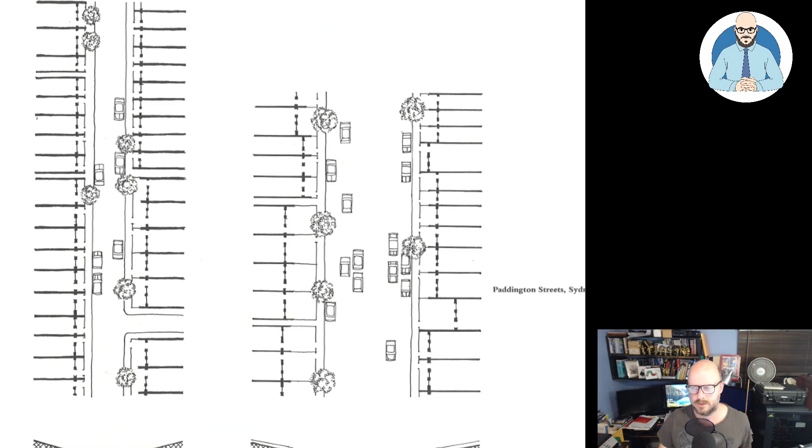So let's have a look. We'll go back in time and we'll look first at Great Streets. I'll hold it up again - here it is. Don't buy the hardcover on Amazon, it's like $400, get the paperback. It's a fantastic book if you're studying architecture.

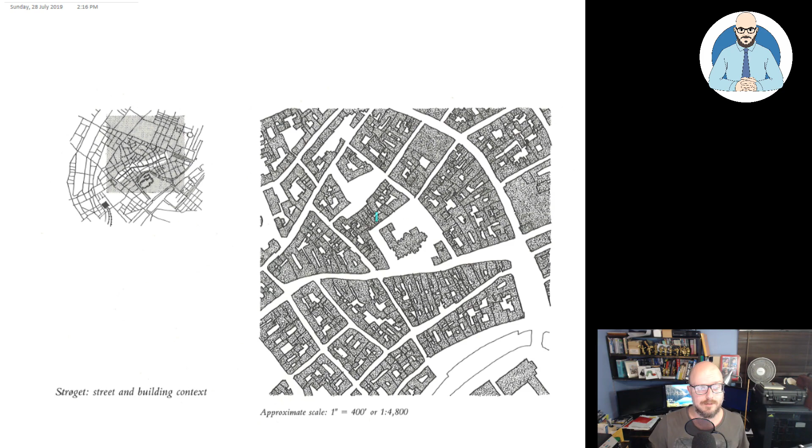So here we have an example, and this is from Italy. Oh, actually, I didn't want to look at that one first, we'll just skip down here. Sorry, we'll look at Pompeii first. Pompeii in Italy, we all know of the ancient Italian city that was preserved.

So this scale here, that's 1 mile across. So every one of these figureground diagrams we're looking at are about a mile across, which is 1.6 kilometers. And the arrow is pointing up - that's the north point. So every map, every plan should be drawn so that north is up the page.

Should. And you can see here we've got a variety of different streets. You've got larger streets and smaller streets, and it is generally in a grid pattern. There are a few dead ends at certain points, but that could have more to do with where it was, maybe on the coastline, or what is built around. But the idea of this diagram is just to give us a really simple and easy to understand representation of the street layouts here. So you can see here is a main street, I would assume, going all the way down, a large one. It's breaking off, you've got other ones approaching it.

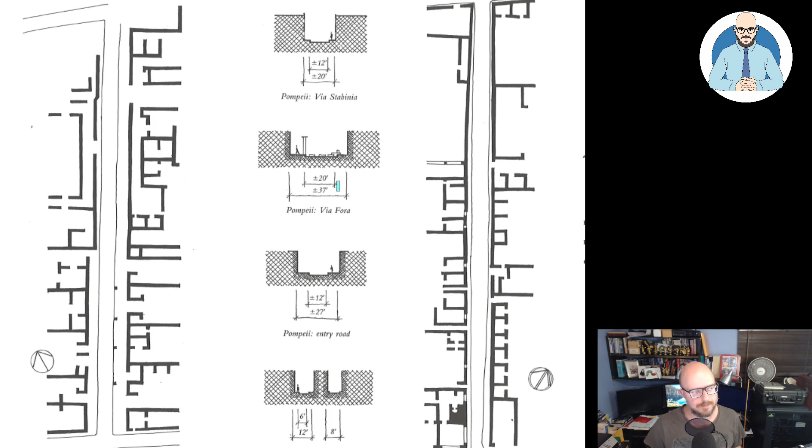So we'll have a look now at this - it's a plan view of a typical street. Okay, and this was on the left. We've got Herculaneum, we've got Pompeii on the right, and there's different sections through the street to get an understanding of it. So the Pompeii streets, Herculaneum streets, Ostia Antica - oh, you got to love my attempts at Latin. In the field, and I'm reading here from their book about ancient streets.

In the field, a sense of scale of these streets is difficult without buildings. At Herculaneum, where buildings remain, the scale is a pleasant one for a pedestrian. No sense of crowding despite small dimensions. This might have been different if there were many people on them. Nonetheless, the term human scale is appropriate. Walkways, as opposed to cartways, take a large proportion of any of these streets.

And you can see here, you've got up the center at a lower point. You can see in the diagram, you've got the pedestrian person there, scale, and slightly lower is the cartway. Here on these streets as well.

Streets are regular in layout, so they're easy to navigate and find your way around, not like the dead-end cul-de-sacs we have in all of our suburbia. The basic physical elements of contemporary streets are all there. Commercial uses, such as corner eating places, existed on these streets.

And also, I think Sargon of Akkad has a good video about the naughty words - that's it, brothel graffiti. And that was quite interesting to hear.

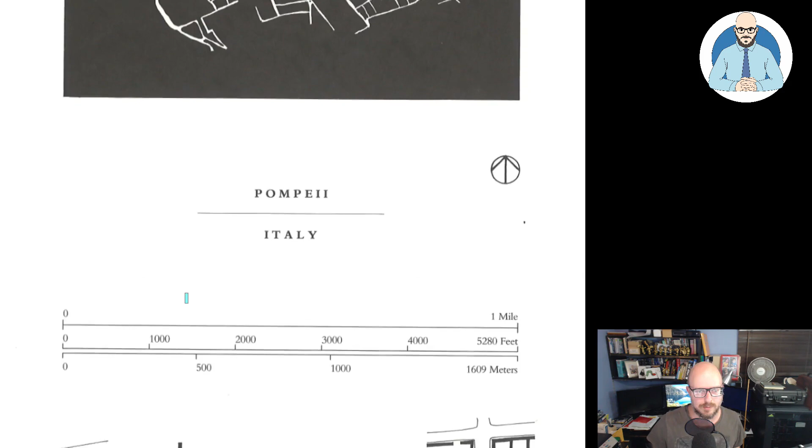And you can just see the scale here. This is a section through the street. And this is important to analyze how - the size of it, the height of the buildings, the scale of it, how high a person, how it feels to you psychologically as you're walking and using the streets, just the widths. And this is an important way to analyze it. So you go from this scale here where you look at the entire street to the sections here.

And then we'll move - oh, I've got Berlin there. We'll look at Berlin. So this is from the historic center in 1986. You can see here you've got the portion of Berlin, and then we've got some of the U-Bahn going across, or the S-Bahn. U-Bahn's above, S-Bahn's below, isn't it? I hope, I should know. I haven't been to Berlin in a while. And forgive the yellow on this image, it's the way I photographed it.

And we can see here, once again, this is a commercial street, so it's slightly different to the one we were looking at before, even though that had commercial aspects to it. So this is in the Kurfürstendamm in Berlin - oh, my German is rusty, my reading in German is probably as good as my reading in English.

So a central significant street with a long history, dating as a boulevard from around the late 1800s, continually changes and evolves. I'm reading from this Great Streets book: a finer street in '91 than in '73, when there were no trees in the central planting strip. So in '73 there were no trees, and they've added them here.

We can see in the section an understanding of the scale. We've got the people here, a building here, another one there, and a nice green tree space. The scale of the trees is important too, because we're going to look at some examples where the scales in our projects, or the examples we're looking at, will change over time, you'd hope.

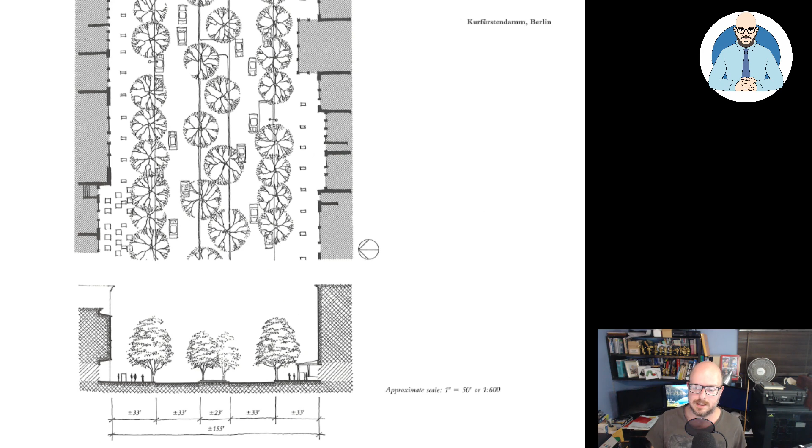Generally in summer, the view is kept low of branches, leaves, storefronts, not of buildings. So there you are - in winter it'd be a different thing. You can also see here where you've got the columns, so you've got a protected space running along here. Same thing here with the building, a protected space with the building coming over.

So you've got two options: you can walk under the trees, or you can walk under the protected space from the elements, which is an issue walking around the streets of Brisbane, I can tell you, particularly when it rains.

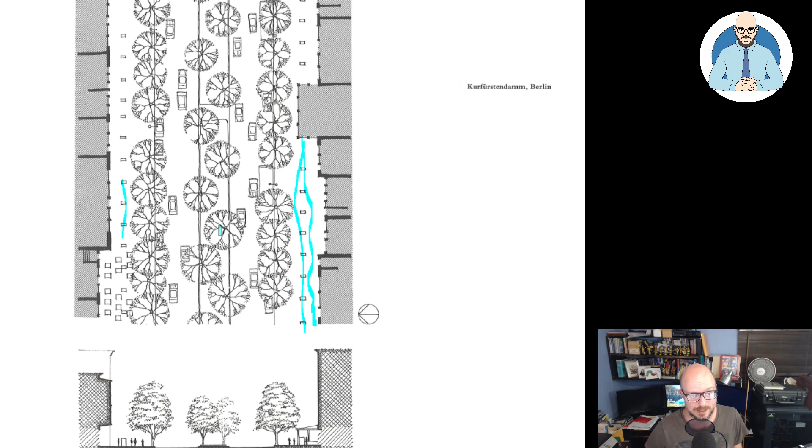And now let's have a look at Paddington in Sydney that was mentioned here. We can just see the figure ground diagram. This is a slightly different scale to the other ones, but it can give you an idea of the building density, built form, and the clear space around it.

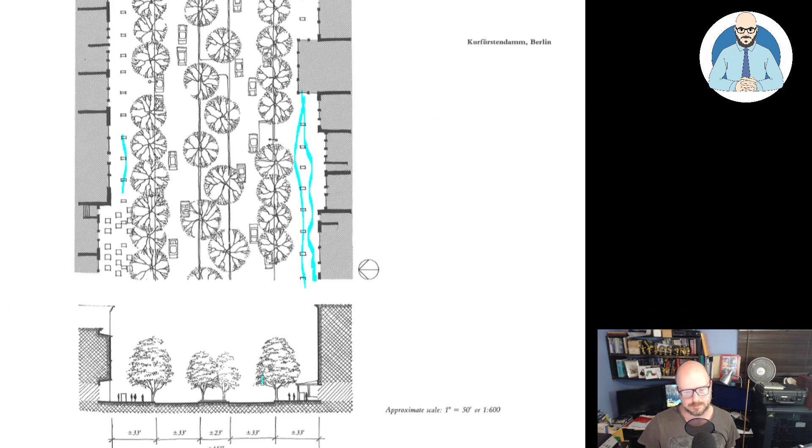This is kind of like a Nolli map in some ways, because it shows where you could publicly access, as opposed to the other ones which were a figure ground diagram just giving an idea of the blocks in the streets. But you can still get an appreciation of the block sizes and where the streets would be cutting through. These here are obviously the backs, at the back of the block, and the front here, I'd hope.

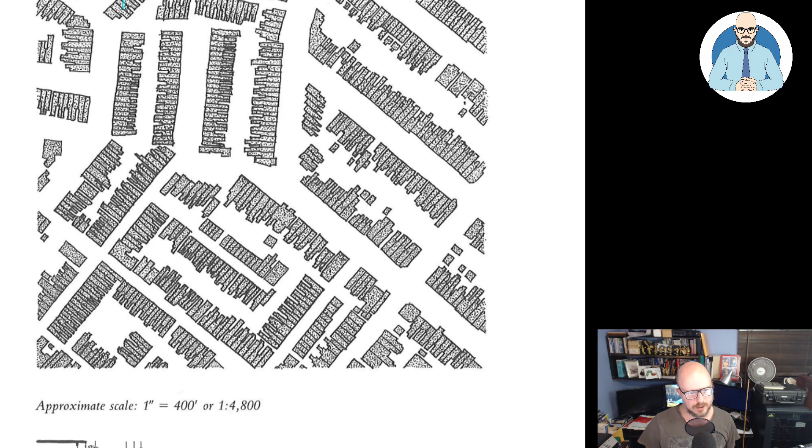We'll have to see. So here we have Paddington Streets in Sydney, and once again you can see just the scale of the streets. And now we have vehicles on here as opposed to Pompeii.

But you've got a pedestrian zone here with some tree planting, you've got the built form, and here the same thing - the scale is a human one. So it's amazingly dense. Once again, I'm reading from the book.

Small scale, single family, terraced housing streets. Many houses are as little as 12 feet wide. Net residential density are 50 dwelling units per acre along some streets - truly high for single family houses.

Public right-of-way of 40 feet are common, so the roads. No off-street parking, so cars park on narrow 20-foot streets that are crowded and slow-moving. The entire right-of-way becomes pedestrian-orientated. Yes, I think I remember driving there.

Some 4-foot wide sidewalks have trees planted along them. Building setbacks of 5 feet are often planted with shrubs. Setbacks and narrow porches are major socializing community building areas.

The street's right-of-way is not unlike Roslyn Place in Pittsburgh. Essentially different are the closeness of Paddington homes to the street and their continuous facade. So you're getting a high level of density here, but you can imagine walking around this space and how comfortable it would be. At a human scale, people are interacting. Traffic will generally slow down just because of the tightness of the street.

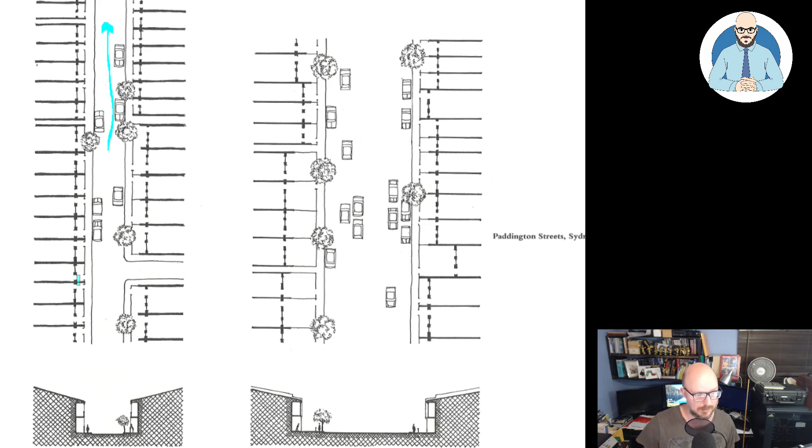So here there are three examples from ancient times all the way to contemporary Sydney here.

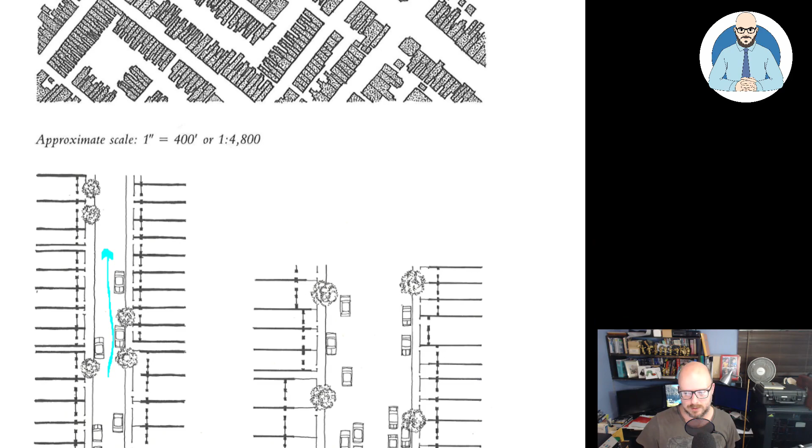Now, the second book I mentioned that I want to look at is A Pattern Language. What we'll do is there's a series of different rules in the book, and once again I'll hold it up. I'll wait for it to come into focus. Now, there are how many rules? You can see it's been well loved, it's got a whole lot of markings on it and things there.

How many rules? A lot. So it goes from Rule 1, which is independent regions, Rule 2 is the distribution of towns, all the way to Rule 253, things from your life. And it even talks about colors in different rules. This is a very useful book, particularly for students who are studying architecture.

And what we'll do is each rule is set up like this. You've got the number of the rule, and they explain it - different patterns that, well, it's not really a rule, it's more pattern, sorry, I should be using pattern - the number of the pattern, and then other patterns that are associated with it. And there's a little summary here, and we'll read through that, not the whole thing.

You can go into greater detail and research that is used to justify these design decisions. And this is the one thing that frustrates me with all of the bureaucratic publications that come out - the lack of academic rigor in a lot of it. It really is. Even discussing with Richard Hames about his methodology, I've been dwelling on it. I'm concerned with the inherent bias in the sources he uses, because they're not going to be able to account for ideological differences in their group. But I somehow think he doesn't care.

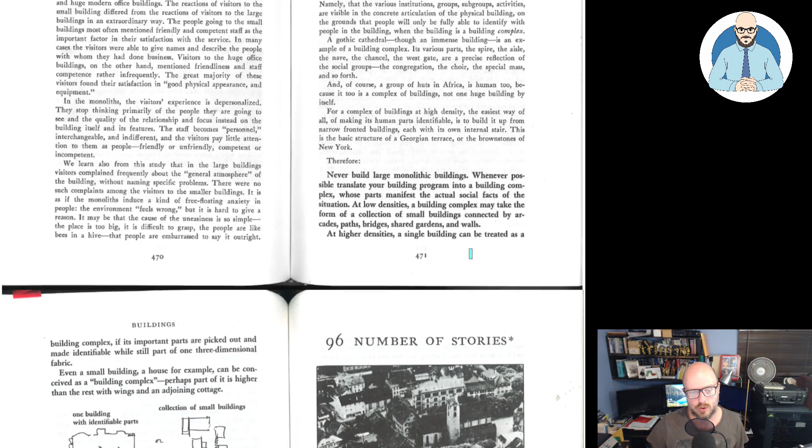At low density, a building complex may take the form of a collection of small buildings connected by arcades, paths, bridges, shared gardens, and walls. At higher density, a single building can be treated as a building complex if its important parts are picked out and made identifiable while still part of the three-dimensional fabric. Even a small building, a house for example, can be conceived of as a building complex, perhaps with parts higher than the rest and wings adjoining a cottage. The advantage is you get spaces in between that can be used.

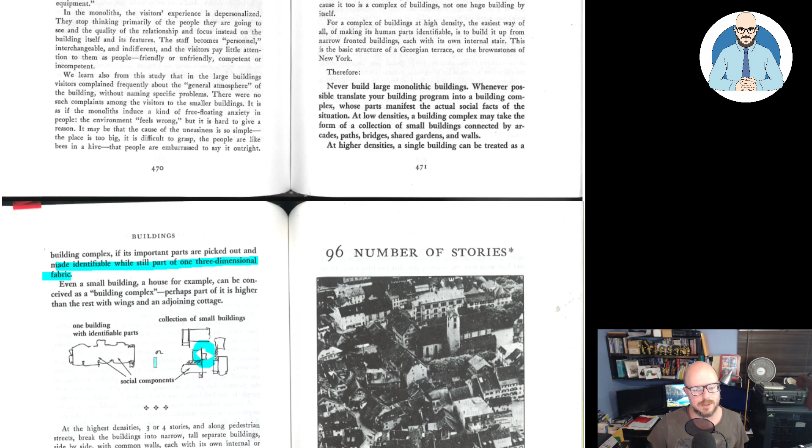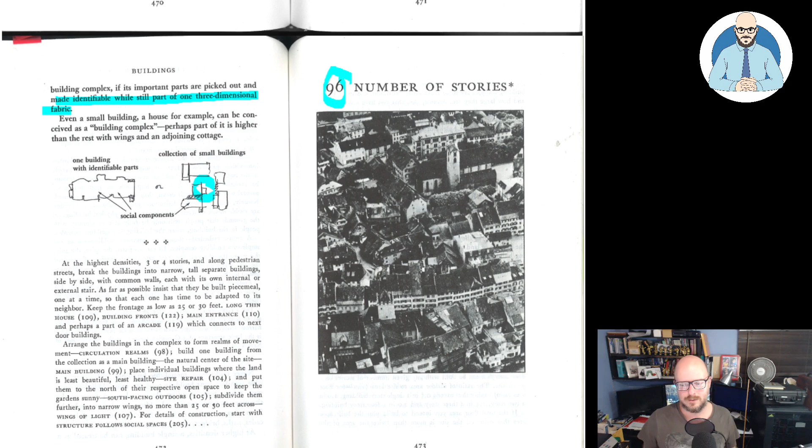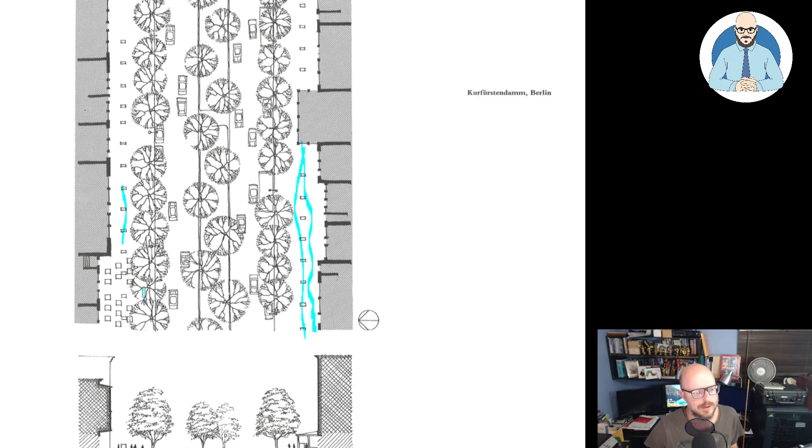So number 96 is the number of stories, and that's going to be very important for what we're looking at. Jumping back quickly, you can see in these sections the number of stories in Paddington, and that affects your psychology, how you use the space, and how you feel when walking up the street. This applies in all these different examples, even going right back to Pompeii.

So here, within the 4-story height limit, they're aiming for a 4-story height limit of the building. Just exactly how high should your building be? They're drawing upon another pattern to look at, a 4-story height limit, and then talking about breaking the rule of thumb.

First, decide how many square feet of building space you need and divide it by the area of the site to get the floor area ratio. Then choose the height of your buildings according to the floor area ratio and the height of the surrounding buildings from the following table. In no case, build on more than 50% of the land. So you can see here they've got a little rule of thumb for the height of the building and height of surrounding buildings—if it's 3, that's the floor area ratio, the ratio of built form to the site area.

You can have a look there. With a lot of these buildings, they're at such a high scale that it really dehumanizes the design, as you can see in the example here. Now, shielded parking—this is interesting, one to consider.

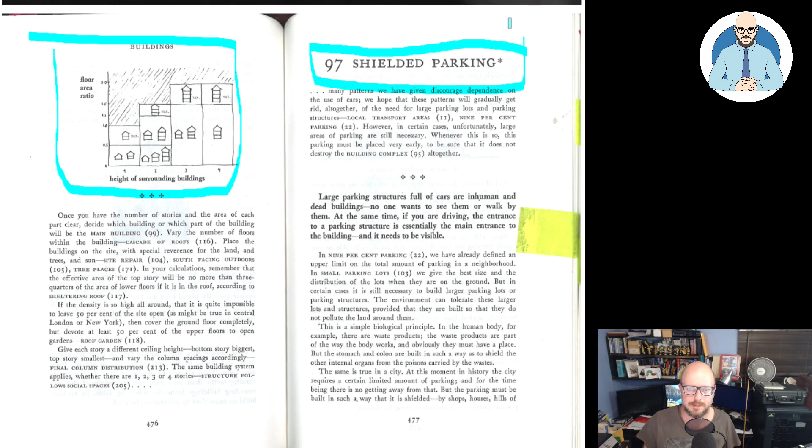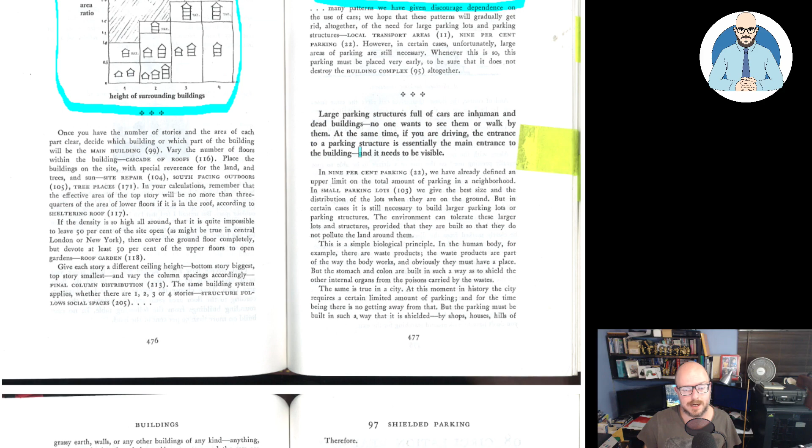With a lot of these, we're going to have basement parking. Large parking structures full of cars are inhuman and dead buildings—no one wants to see them or walk by them. At the same time, if you're driving, the entrance to a parking structure is essentially the main entrance to the building and needs to be visible.

So this is another concept where they're looking at shielding the parking structures with a building at the front. This isn't part of the examples we'll be looking at here, but in commercial parts of the city it's a lot of the time not really something to worry about. Rather in the suburbs—I think in part of Mascot—you can see it like in the Bunnings and those types of things, with shopping malls surrounded by huge desert car parks, when you'd rather invert it to activate the street.

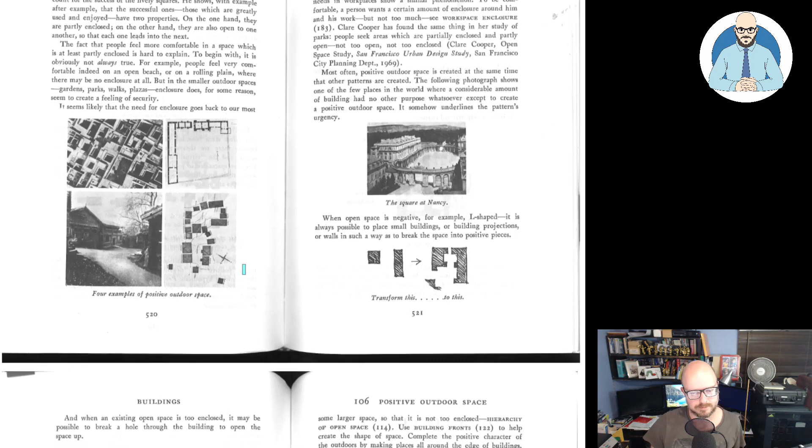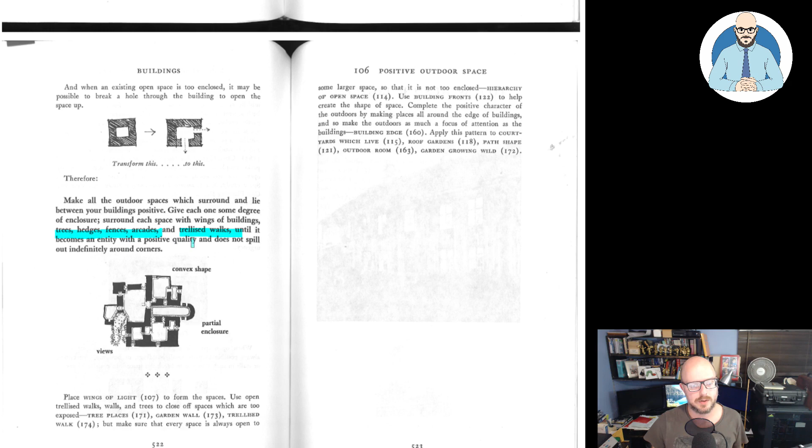And then here, rule 106, positive outdoor space: outdoor spaces which are merely left over between buildings in general will not be used. You can see the difference here between leftover spaces and used space, and here's another example showing the transition from this to this. You can see here some more options: make all of the outdoor space which surrounds and lies between your building positive. Give each one some degree of enclosure, surrounding each space with wings of buildings, trees, hedges, fences, arcades, trellised walks, until it becomes an entity with a positive quality and does not spill out indefinitely around corners.

So, I need a coffee.

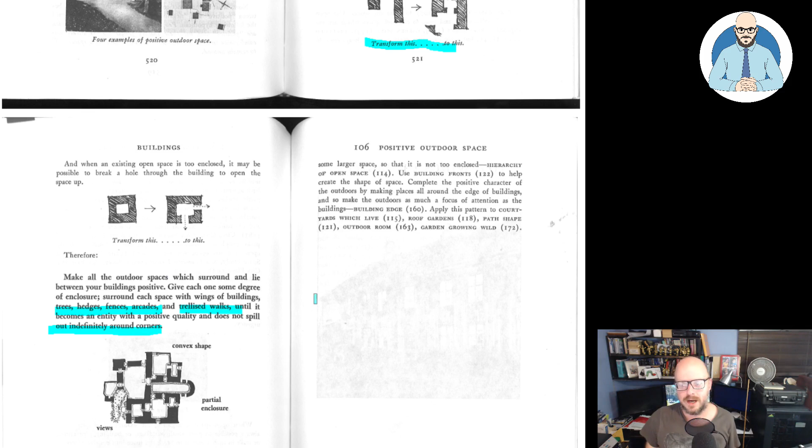We've had a look at some ancient streets, contemporary streets, and just got an understanding of the feel of it. We've looked at just a few patterns here that we should consider when we're designing.

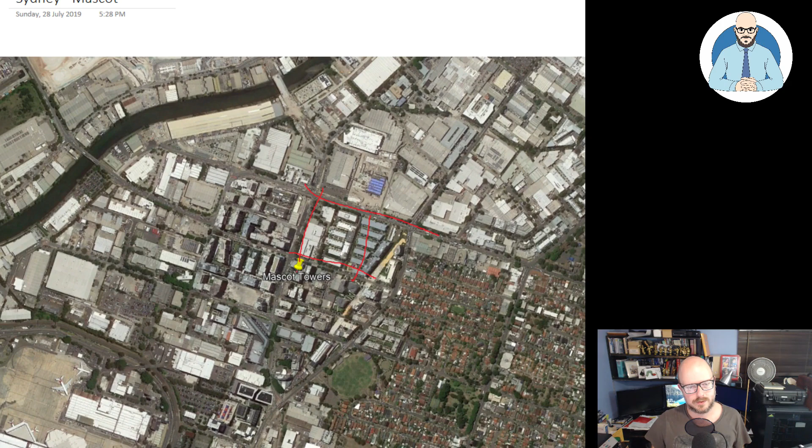Now let's have a look at Mascot. So first we'll jump here. You can see here we've got a density to it, where this is the street grid we're looking at—bigger streets here, down bigger blocks. But if we're looking, and this is at 77 Bourke Street, just look up the street here.

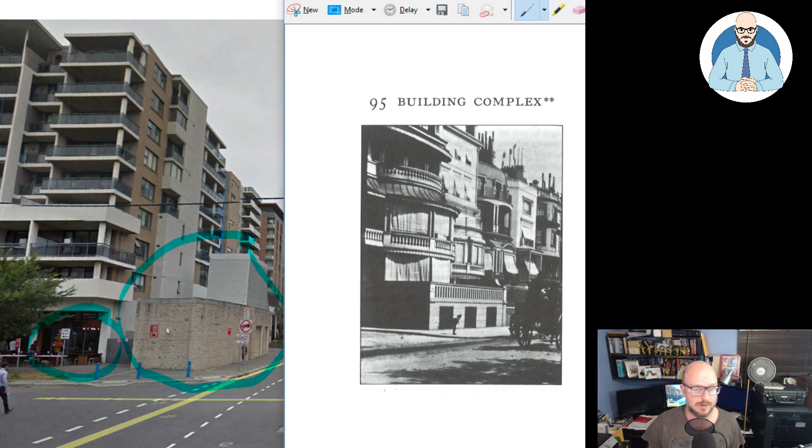And here, look, we've got a complete blank wall just there, pretty much, with 3 windows and a few little cutouts, and some balconies here. I'm sure the architect would have designed it with more complexity, or they just give up because it always gets removed.

So we've got some layering here. On this side, there's a feature to define the corner. The issue is it just feels very high, and there's no life in it, so it affects how people can relate to it.

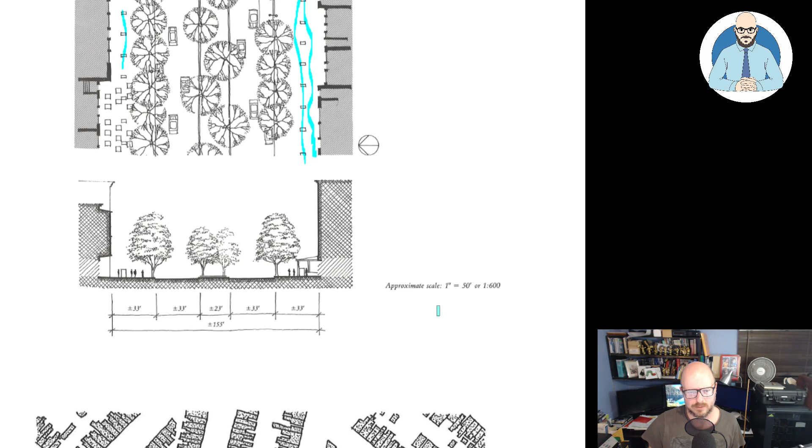Jumping back to here, some of the claims that were happening with these buildings - it is a challenge, an ongoing challenge. We're getting these horribly built buildings that are now full of defects, happening again and again and again. People are paying a fortune for these things, and some of the patterns and rules that we want to get a comfortable city for people to live in, they don't seem to be occurring, do they?

There was an attempt here. It feels a bit dirty and all over the place, doesn't it? I guess when it grows bigger and larger, give it time - hopefully these trees here will all grow to this scale. But still, you want to try and get a bit more activity in the space. It's not the hustle and bustle, it's just cars coming and going.